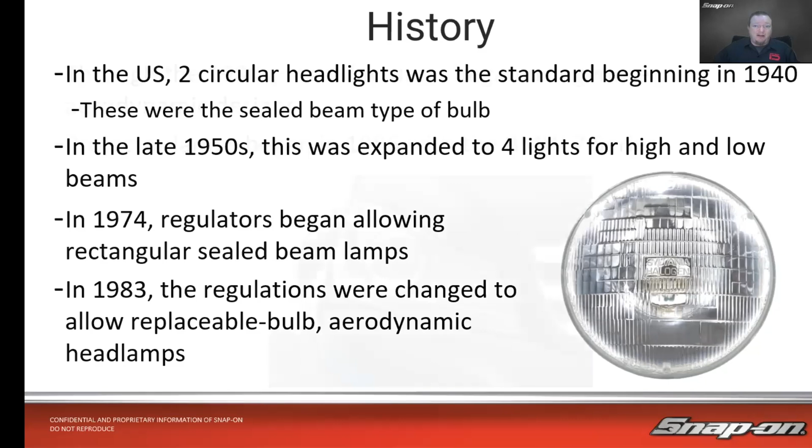And then the manufacturers kind of took that and ran with it. Throughout the 80s, manufacturers started using more aerodynamic designs, and projector lamps began in 1986 on the BMW 7 Series. They started using those projector beam type headlamps, which give you a sharper cutoff and so on.

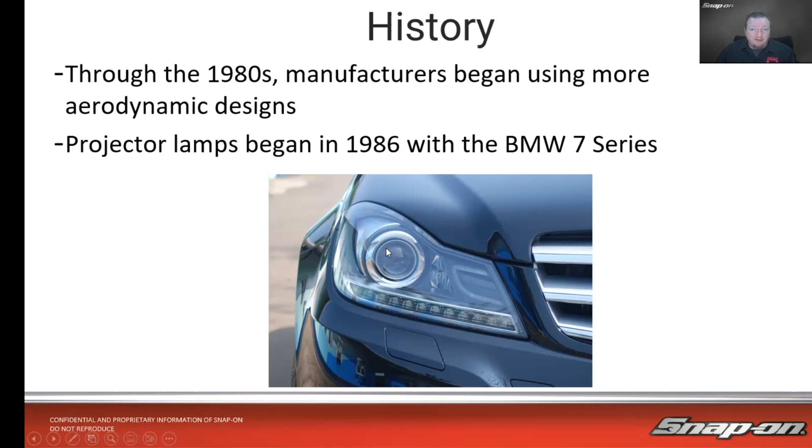That brings us to the 90s. During the 90s, manufacturers developed HID lamps. HID is high intensity discharge bulb, uses a high voltage, uses metallic salts in order to create an arc, and that's what causes the light.

The first mass market HID lamps were in the 1992 BMW 7 Series. So there's that 7 Series again. Seems like that's their experiment - let's put in the new stuff into that model, right? And then the first 4-bulb HID system, so low beams and high beams, was in the 1999 Mercedes CL class.

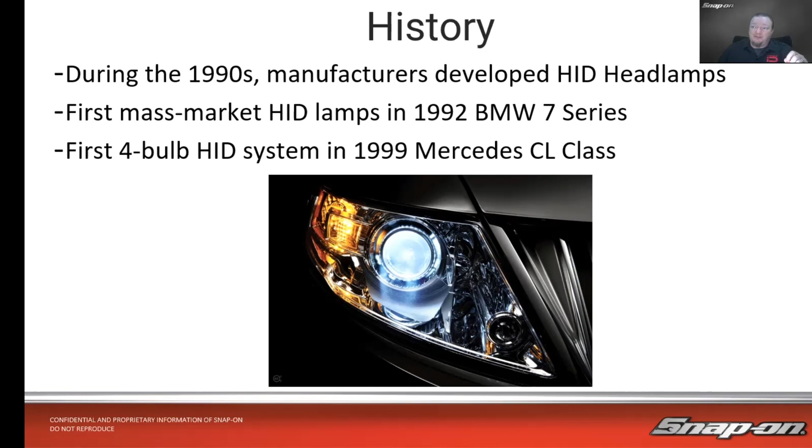That brings us right to the turn of the century into the 2000s. Now, starting in 2004, manufacturers started developing technology for LED headlamps. They didn't quite have it down until about 2006, 2 years later. First mass market LED lamps on a vehicle were in the Lexus LS600H.

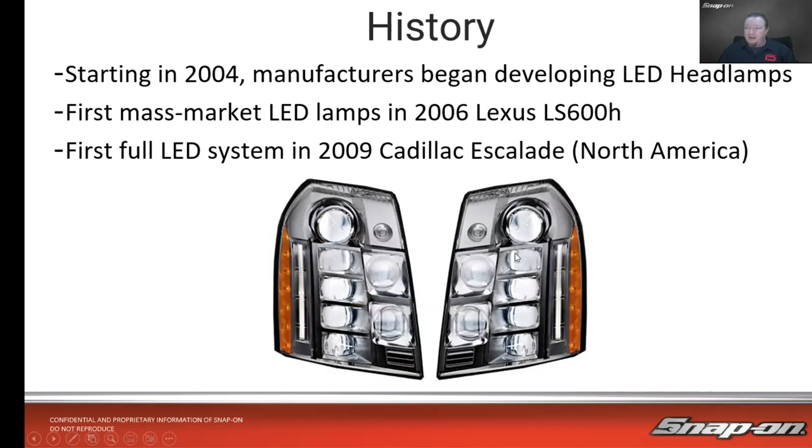The first full LED system, where all the bulbs were LEDs - they didn't use any halogen, any HIDs - was the 2009 Cadillac Escalade, and those are their headlights right there. Fully LEDs, no other bulb types in there, and that was the first one in North America.

Now let's talk about the projector lamp. They can be used with both halogen or HID lamps. What it does is we have our elliptical reflector back here where the bulb is in the back, and it'll bounce the light all over the reflector. Then it comes down into the chamber, and we have a lens right here.

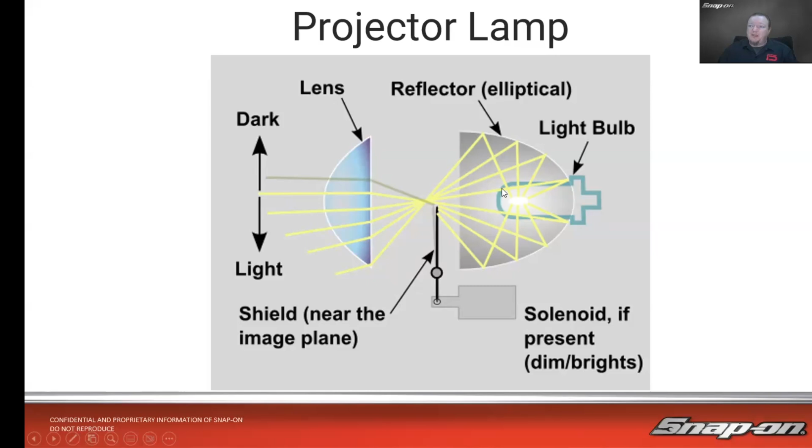Now, depending on where the shield is, it can give us both high beams and low beams. Not all vehicles or not all projector beams have this shield. It's only if I have the two-way, where I have a low beam and a high beam at the same time, and the solenoid will move it up and down and out of the way, so it can block off some of that light so it doesn't go through the lens, and that's where you get that sharp cutoff thing.

So as I said, projector lamps can be used with halogen or HID bulbs either way. They use that reflector and the lens that gives the beam that sharp cutoff. Combo low and high beams use that shield to change the light pattern.

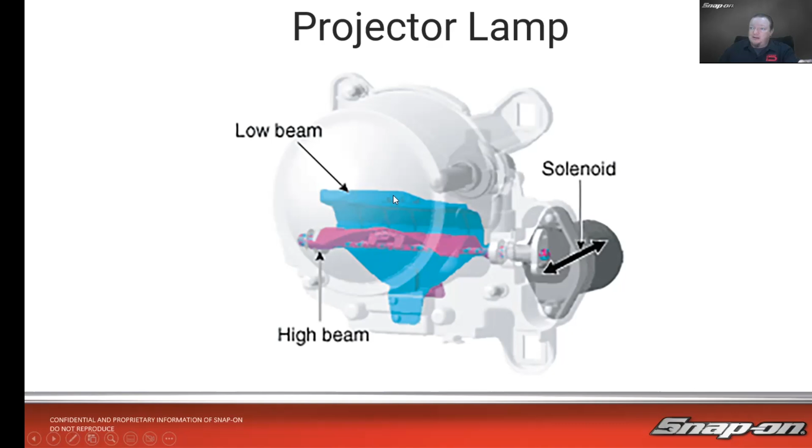So this shield right here is a little bit better view of it. We have a solenoid, moves back and forth, in and out, and it's got this little cam here that moves the shield either up or down. If it's down and out of the way, that's my high beams - it gives me my full output of the light. Or when it comes up, it gives me my low beam, and it gives me that cutoff at the top, so it gives me that sharp cutoff.

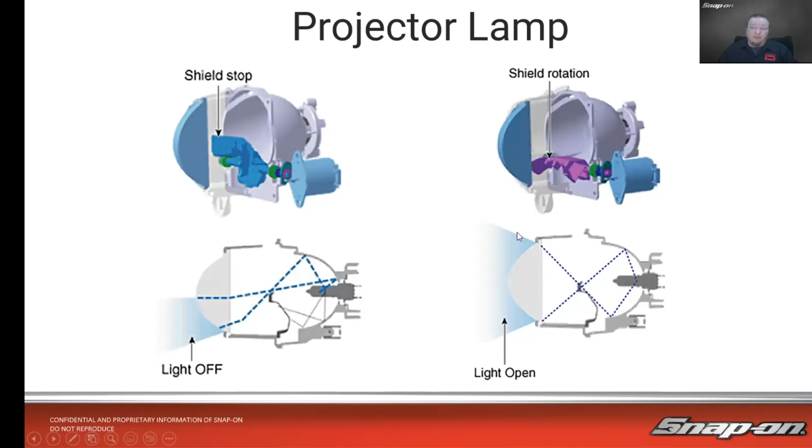Here's just an example of what that looks like. With the shield stop up, it's going to stop some of that light from getting through. And then with the shield rotated down, it lets all the light come through and allows it to go through the lens there. So we can see how the light kind of bounces a little more uniformly with the high beam, makes it much brighter. But it allows us to do high beam and low beam both at the same.

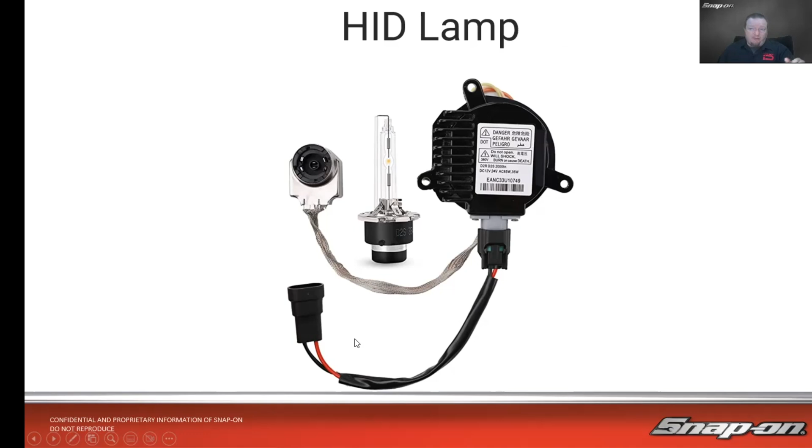When we're testing these, we want to test on the input side, the low voltage 12 volt side. Otherwise, the high output side can hurt. So what they do is they use a high voltage arc to ignite between those two tungsten filaments. You do need an AC ballast - it doesn't work on DC, it works on AC - and an igniter to supply the proper voltage.

You also may hear these called xenon lamps. Xenon gas is what they use inside that sealed bulb to get that arc started. Now the bulb has 3 different phases: we have the ignition phase, the initial phase, and then the continuous phase.

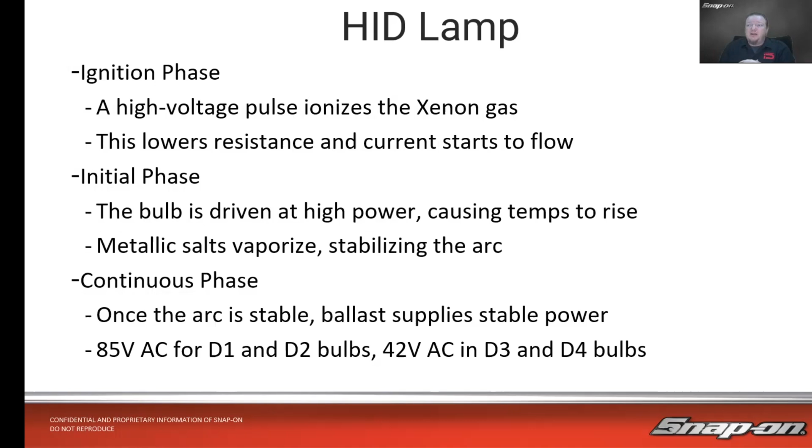During the ignition phase, a high voltage pulse ionizes that xenon gas - it could be 10, 20,000 volts. Works very similar in principle to a spark plug - we have to get the spark to jump. It's going to require more voltage to jump the gap than it is to keep it going. So once it ionizes the gas, it lowers the resistance, and current is then able to start flowing.

During the initial phase, it drives that bulb at a high power, high voltage, which causes the temps to rise rapidly in there.

As it rises, the metallic salts that are in there also vaporize, which stabilizes the arc. Then during the continuous phase, once it is stable, the ballast is going to supply a constant voltage, stable power to keep it from flickering.

They have different bulb designations. So D1 and D2 bulbs, you're going to see 85 volts AC. And on D3 and D4 bulbs, it's 42 volts AC there, so about half between the two. So it works on that principle of ionizing the gas and allowing it to flow. It forms a plasma, and the plasma is what glows and causes that very bright white light.

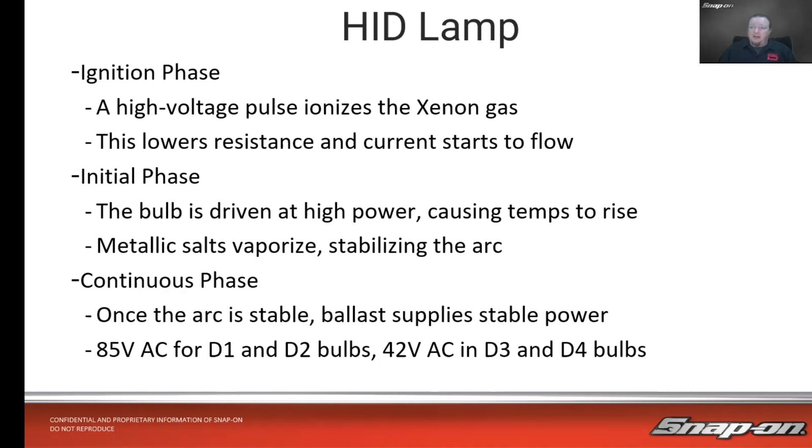Next one's LED lighting. So LEDs, as we saw there, stands for light emitting diode. Many benefits to these LEDs too. Longer lasting, so just lasts longer than a burning filament. Less power draw. Brightness is now better than HID. In the beginning, they weren't as bright, but now manufacturers have gone through changes and developments, and now the brightness is brighter than HID bulbs. And HID bulbs taking all that power to start them up, a lot more benefit with the LEDs.

That's why you'll see any hybrid cars, electric cars, almost exclusively LED bulbs. This also allows manufacturers flexibility in designs. I remember when they first came out with this Hyundai Tucson with the fancy LED lights there. Everybody's like, oh wow, you're blowing my mind here with these lights. They're not even the headlights, they're the daytime running lights, the headlights are down here. But they were just talking all about how it's so different. And it is. Yeah, it looks pretty cool.

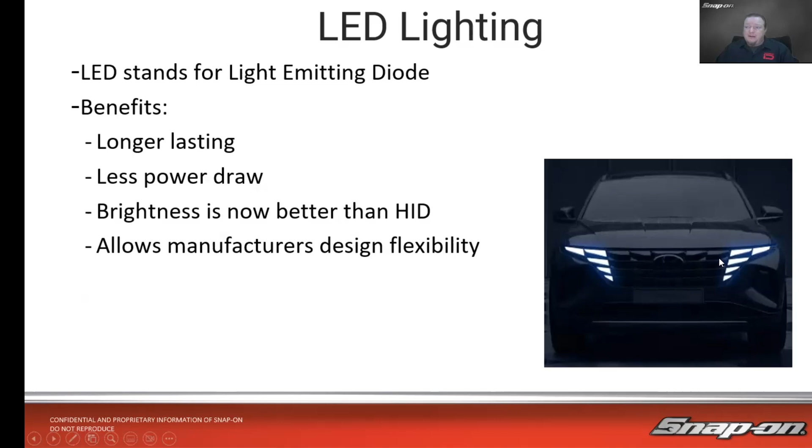And it's a 5-piece design. So we have the housing on the rear. We have the reflector and LED assembly, that's what does all the work. You can see the individual bulbs in there and how they would kind of reflect. An outer lens to protect it, lens bracket to hold it all together, and then a garnish on the outside to blend it in with the grill. But the LED lights, there's some cool things they can do with LED lights. We'll talk about in a little bit, like dimming just part of it in order to dim the high beams and so on.

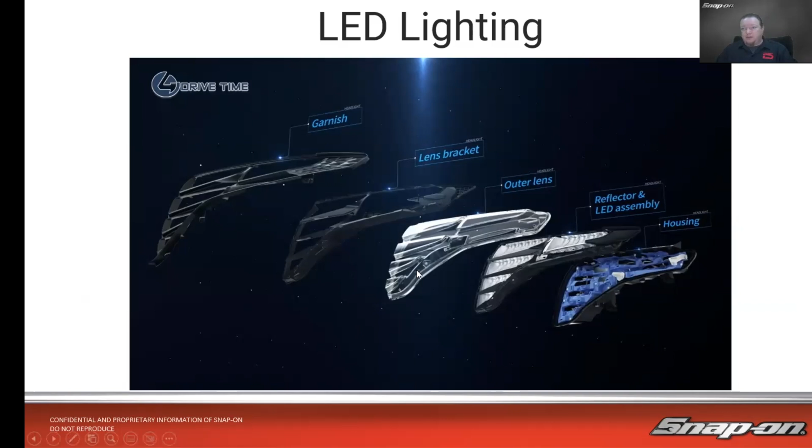Now let's get to intelligent lighting. So intelligent lighting is we're going to be dealing also with ADAS when it comes to this point, multiple sensors and servos, things of that nature.

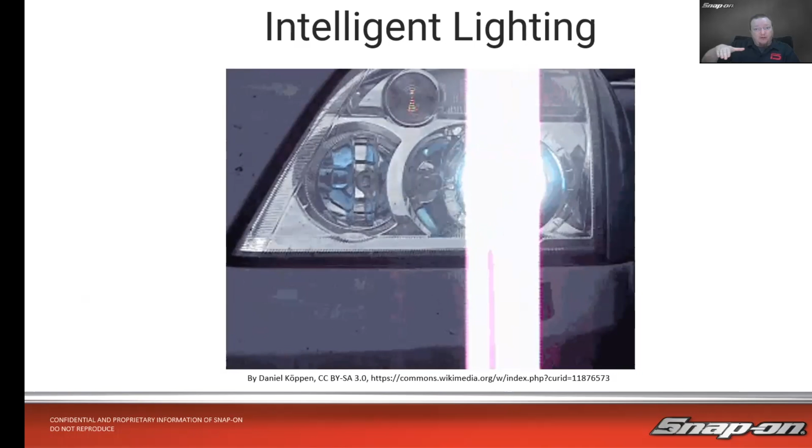It allows us to move the bulbs side to side if we need to, going around corners, allows us to level them out if the load in the car shifts and changes. So many modern vehicles use computers to control the vehicle lighting.

Of course, we have sensors and switches. Some examples include automatic headlights. I leave it on auto mode. When it's dark out, they turn on. When it's light out, they turn off. Automatic beam switching, so it can go turn on the high beams automatically for me, and then when a car approaches, it'll turn off the high beams or dim it, as we'll see in a little bit.

Headlamp leveling, as I said, different load values in the vehicle. It can be a little heavier on one side or the other, or heavier front to back, so it's going to level them automatically as well. And then we talk about directional headlamps. So turning right, my headlights go right. Turn left, my headlights go left. Now they've had those for a long time back in the day with the Tucker, one of the more famous ones that had that center bulb that did it. But now, instead of doing it with a linkage, they do it with motors and sensors.

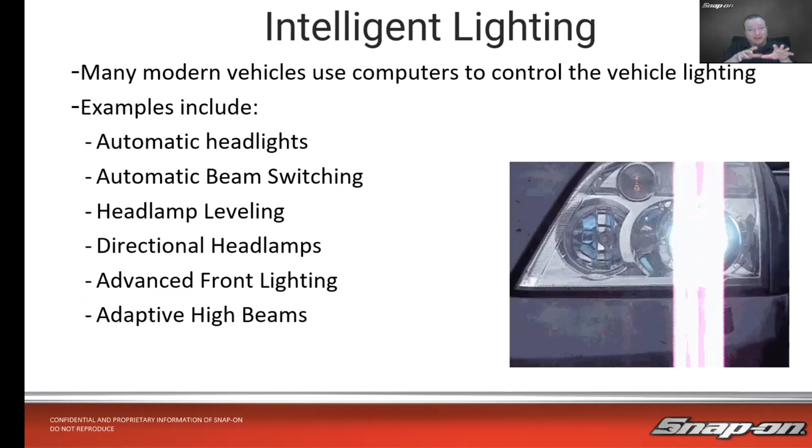Advanced front lighting, which would be being able to kind of form the beam, and then adaptive high beams again, able to adapt to their surroundings. So different manufacturers use different ways of going about this. There's a variety of sensors to do this.

So a lot of them use a front view camera: hey, I see a car with headlights coming the other way, let's dim our lights. Sun load sensor: if I have no sun load, then the sun's not out, and that means I need to turn on my lights. Rain and light sensor, same thing: if it rains out, wipers on, headlights on. Or light sensor, they could use it with that as well, so if they don't see sunlight, then they'll turn the lights on.

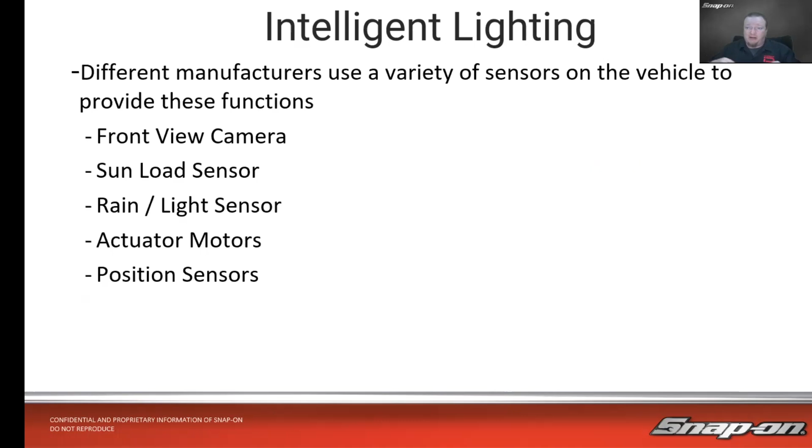Actuator motors to move the lights back and forth, up and down, however they need to be moved. And then, of course, the computer needs feedback for that, so there's position sensors involved with that as well, and resets and relearns and things that need to be done.

Here's an example on a 2019 Cadillac ATS. You'll see there's not a lot going into these lights. That's the left headlight, that's the right headlight. And we got power, we got ground, and we got network.

So to test these, we need to test power, we need to test ground, power supplies, but we also need to make sure that it's getting the network connection as well. So it needs to be getting data off the bus from a multitude of sensors, could be a ride height sensor, could be steering angle sensors, and so on. Gets all that information and tells it what to do.

So we have a horizontal motor, which does side to side, and then we have a leveling actuator, which goes up and down. And that's all kind of part and parcel of that headlamp. So it's a different way of thinking about diagnosing things when it comes to this.

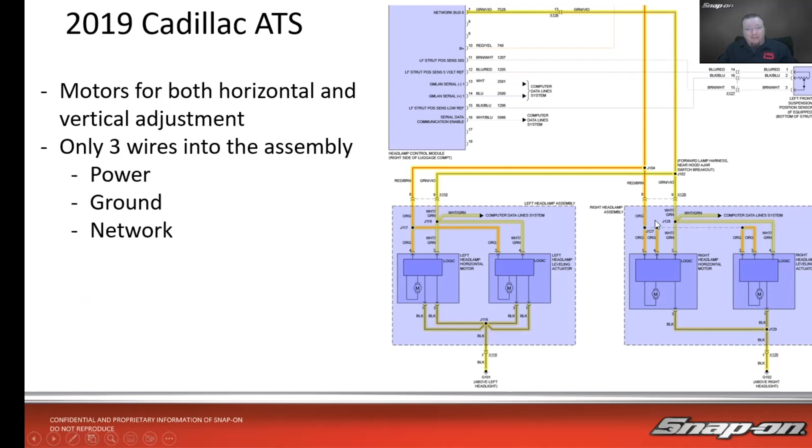This one's even more fancy. This is a 2019 Mercedes E-Class, and it's LED headlights. And what it does is it uses a matrix of those LED bulbs to auto dim the high beams. Now it can kind of turn them on and off and move them around. Adaptive high beams, they call it.

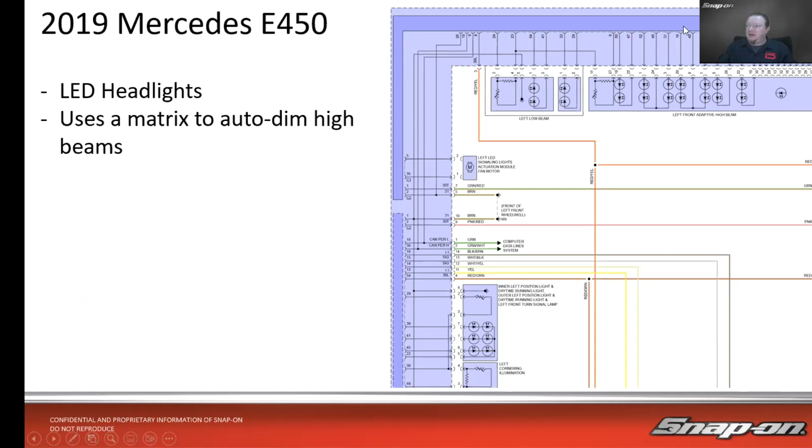And they have, you can see where all the LED connectors are. And this is the front LED matrix lamp, kind of goes around like that. So we can see we have these elements in here, these adaptive high beam elements, and then the low beams in there as well. And then we can see all the other little LED matrices in there.

Signal lights, fan motors, because the LEDs do generate a decent amount of heat, so they have fan motors in there. And then down here we have our inner left position light, running lights, outer left position lights, cornering illumination, and a couple more motors there.

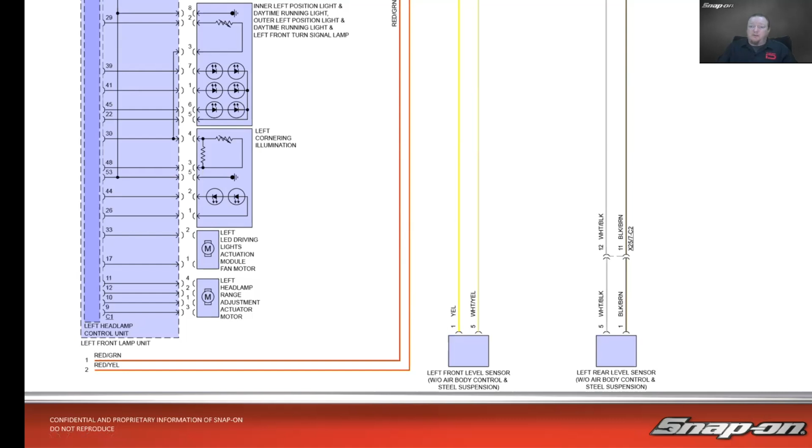Also, to feed into the system, front level sensors and rear level sensors, so it knows where the vehicle is in space, where it's moving. So some interesting tech there.

This one's really interesting, I think. Laser lights. So they got cars with laser beams. Uses a blue laser light to generate a beam, as you're found on BMWs. There's a couple other manufacturers that I think have been experimenting with them. BMW has quite a few vehicles with it.

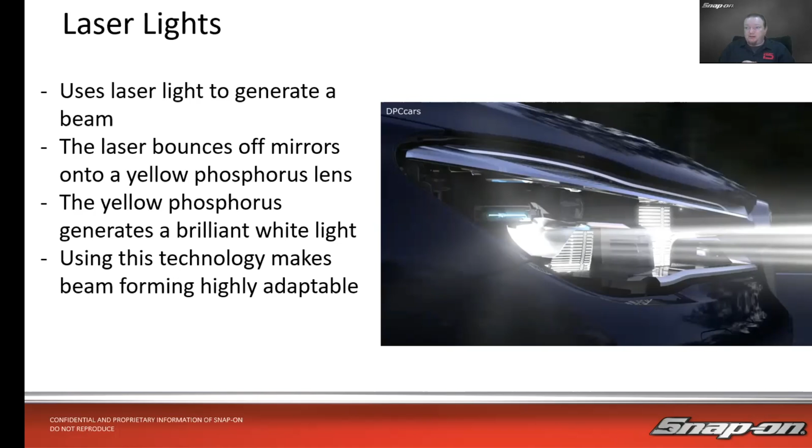Uses laser light to generate a beam that bounces off the mirrors onto a yellow phosphorus lens. So it's a lens coated with yellow phosphorus. That yellow phosphorus, when it gets hit by this blue laser beam, it's going to excite and it's going to generate a brilliant white light. Using this technology also makes beam forming highly adaptable.

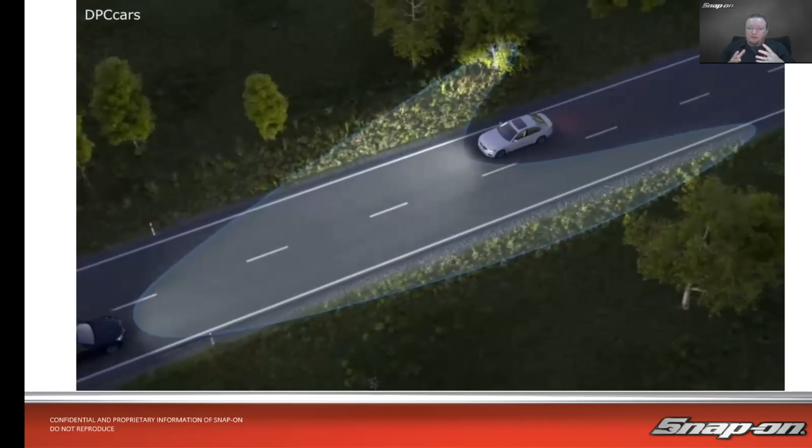So let's watch a little video here. Car's going down the road, oncoming car. It's able to shape that beam and move things around and adapt it to that other car, and then it just brings it back the way it is. That's pretty cool, let's play that one more time. So car comes in, it adapts the beam around it. When it finally comes close enough, it just sucks it in, and then it stretches it back out.

So I really don't have to do anything. I don't take my eyes off the road. I don't have to touch any buttons to do this. Another benefit of this, I was reading in an article today too, that they could use this as like a heads up display. So actually could project things on the road in front of the driver in their field of vision, like speed limits, things of that nature. Actually project that onto the road. And I think that's kind of cool. It's almost like that augmented reality, the AR stuff that's out there. It's kind of neat, makes it a little safer.

Also, the beams can go about half a mile down the road, which is way further than we can get with other existing technologies. So maybe eventually the price will come down, because I'm sure they're actually - we'll see how pricey they are here in a little bit. But interesting technology, and it's coming to a shop near you.

All right, let's switch over to my Zeus Plus. Yep.

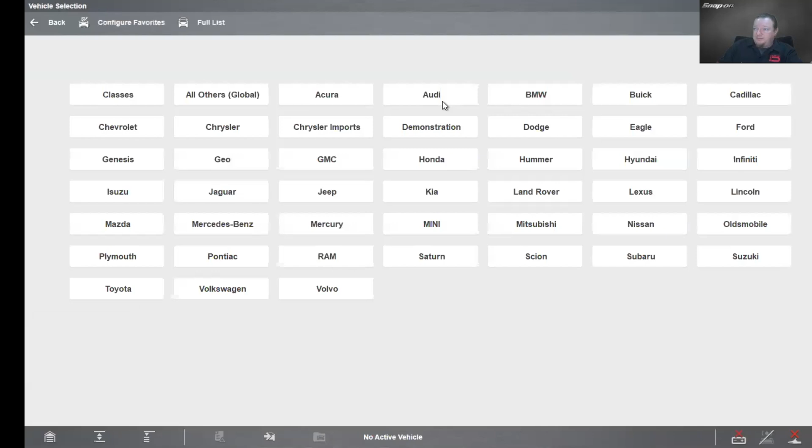All right, so before we even go in and ID a vehicle on this, let's talk about, maybe I want to learn a little bit more about this stuff that I'm talking about. So if you have a snap-on tool with guided component testing, that'd be anything with a scope, so Zeus Plus, Zeus, Verus, Verdict, Vantage, Triton, Modis - any of those tools with a scope are going to have guided component tests. And in the guided component test, before we ID a car, you'll see there are classes. And if we go into how-to, there's a couple classes right off the top here.

So we got HID lighting class.

High intensity discharge (HID) lights are now being used by vehicle manufacturers as an optional extra on many models, and may also be a standard fitment on top of the range models. This system replaces the standard filament bulb used for dip beam operation with a specially designed bulb. The bulb contains two electrodes approximately 4 millimeters apart and a quartz bulb containing mercury, metal salts, and xenon under pressure. The advantages of this type of system are as follows.

Due to the absence of a conventional filament, the lifetime of the bulb is greatly increased. You don't have to worry about that filament heating up and cooling off repeatedly. It can be as much as 4 times greater than a standard bulb.

The driver will have a wider field of vision and greater illumination during hours of darkness, and it allows 2.5 times the light flux at approximately half the temperature. Light flux is the flow of energy from the bulb in the form of light.

We also have a couple different ways that they can aim the bulbs. A system must be in place to automatically adjust the headlight level under transient conditions, such as cornering or when the vehicle has a load.

The lateral acceleration sensor can tell the vehicle's dynamic characteristics using cornering data from the electronic stability program. Signals are put on a CAN bus network where the HID control module can access the information and decide what to do, or use front and rear height sensors on the suspension so it knows what angle the headlights should be at.

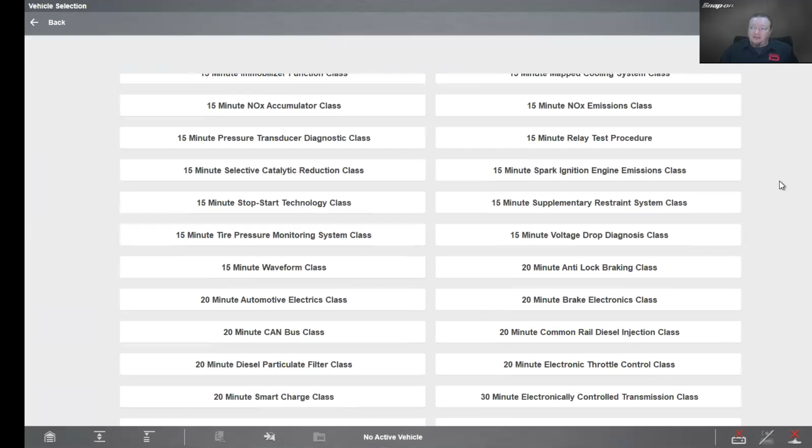Not that way. Activate. So this is a 2019 Genesis. Let's take a look at some repair information. Oh geez, I'm signing in too much—let me sign myself out.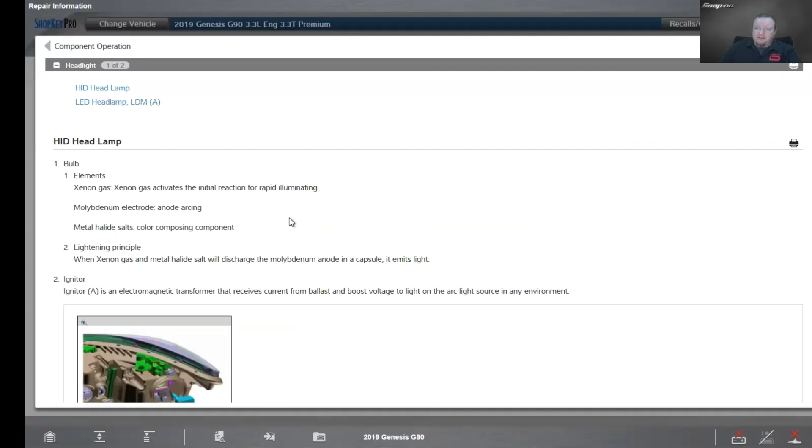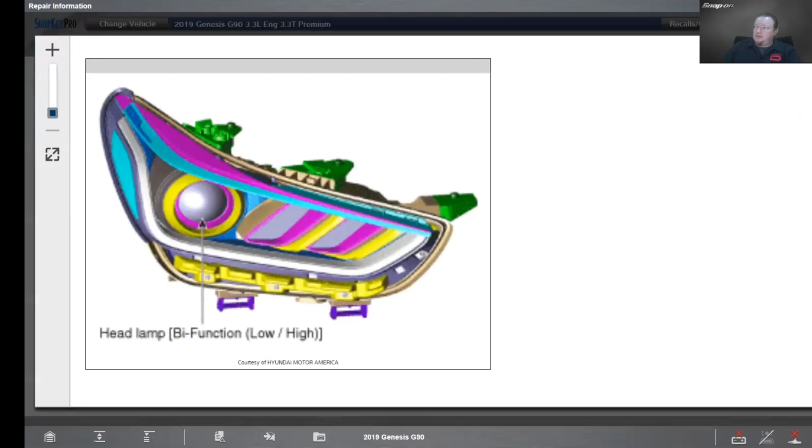All right, so let's look up headlight. Okay, so we've got some stuff here—a component operation section that will tell us how it works. We've got a little bit about the HID bulbs and bifunction bulbs, which have the projector beam in there as well, so it's got high and low beams—that's where I got the pictures of the little flapper there. We've also got the solenoid, and you can test it to make sure it works.

You can test the connections there to make sure that works. And the LED panel is going to be more like a light panel—it's going to have an LED module, cooling fan, and LED driver.

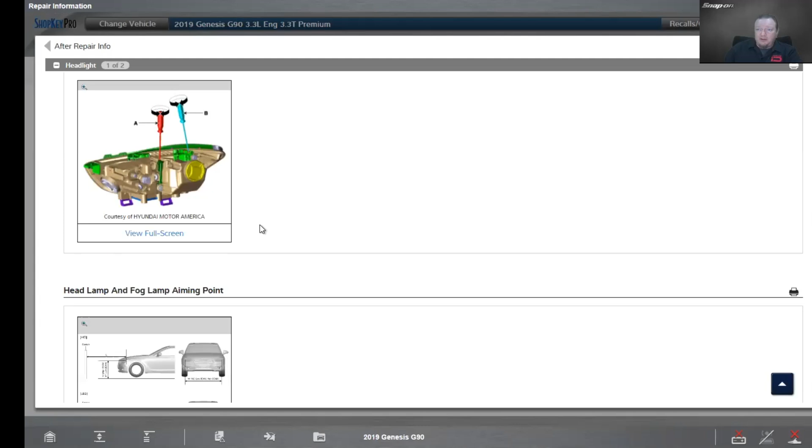Let's see—after repair, it's going to talk all about headlamp aiming, and yes, we are still using screwdrivers on some of these to get the actual lamps aimed. It gives you all of the measurements and things you need to do in order to aim them, just like any other headlamp.

There may be a reset or a relearn that needs to be done on some of these. Let's take a look at how long it takes—it takes about 2 hours to do both sides.

You've got to remove and install the bumper cover—that looks like that's the bulk of the time, because it's only a 2/10 of an hour difference between the two sides. And $1,700 for the headlamp assembly—that's one of the cheaper ones we're going to see, just so you know.

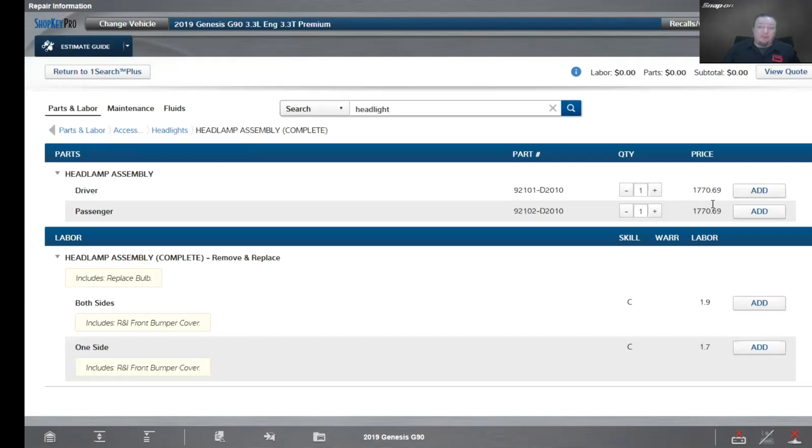Let's see, was there a guided component test on this? I think there are, yes. So in the guided component tests, there's also things for the lighting system. If we go into body electrical and exterior lighting right here, we can see HID headlamps.

If we go into information, it's going to tell us how they work—now, we already read through the operation there, but it can be up to 20,000 volts to start that arc. So just be aware, stay away from the business end of that. You want to check it on the input side.

The vehicle is equipped with a set of high-intensity discharge headlamps. These headlights implement a ballast igniter which increases the vehicle's battery voltage to a high voltage in the region of 20,000 volts. Caution should be taken while diagnosing these headlights, and testing should only take place on the battery voltage portion of the headlights, on the input side, as I said. This portion is the wiring harness traveling to the ballast igniter and back.

Never should one test the high voltage exiting the ballast igniter. Always follow the manufacturer's recommendations and warnings. Failure to follow safety warnings can lead to injury and/or fatality.

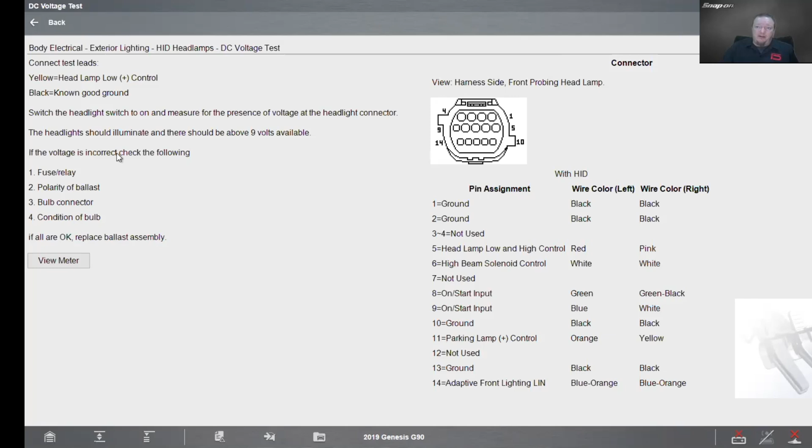Go to a DC voltage test, we can see where to hook it up. So headlamp low control right there, and it's the red wire on the left and a pink one on the right. We can see how each of the wires goes in there. Then we want to check it - that has to be above 9 volts for that to work.

All right, that's going to say failure because I'm not hooked up to a car, but you could go through and update the parameters in the module when you replace it. So that's pretty helpful.

Functional test for this, let's see what we got, if any. Not available because we're not hooked up to a car. Okay, so that's adaptive lighting and HID lighting on this Genesis.

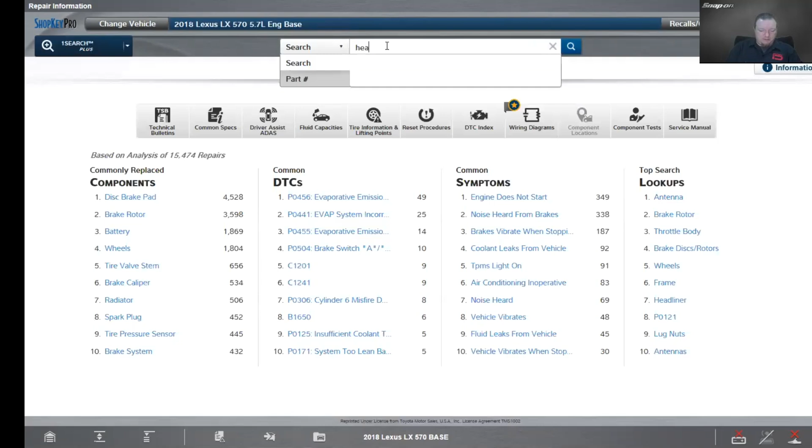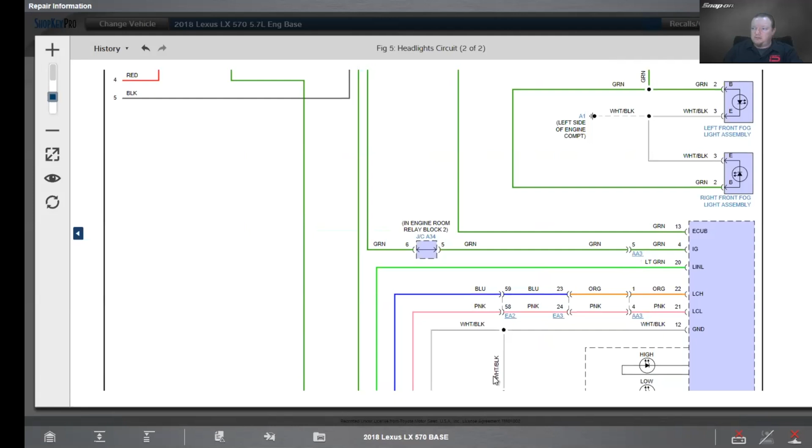So we got a cooling fan there, headlight leveling motor, high and low beams there. Also going to have our ground there, low side, high side LIN on this as well. So there's a network bus involved here as well. So a lot of network stuff going on, especially on these newer vehicles. We got CAN high and low right there as well.

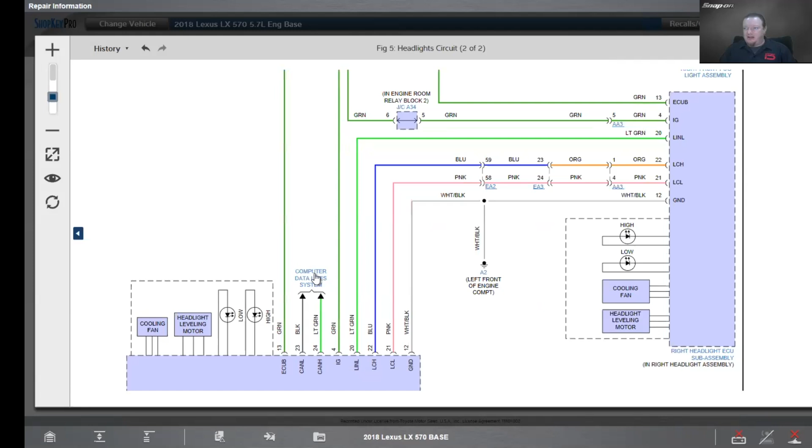So it looks like this side, which is the left side, it's got the computer data lines, and then it sends information over a LIN over there.

And these ones are a little more fancy. So let's see, after repair information, it's going to tell you how to initialize it using the scan tool if you need to. Then parts and labor, let's see - 2.7 hours, got to remove the bumper again, $2,900. So we went from 1,700 to 2,900. These are a little bit more fancy.

Going to guide a component test on this one again - body electrical, exterior lighting, headlight assembly. And we can go in there.

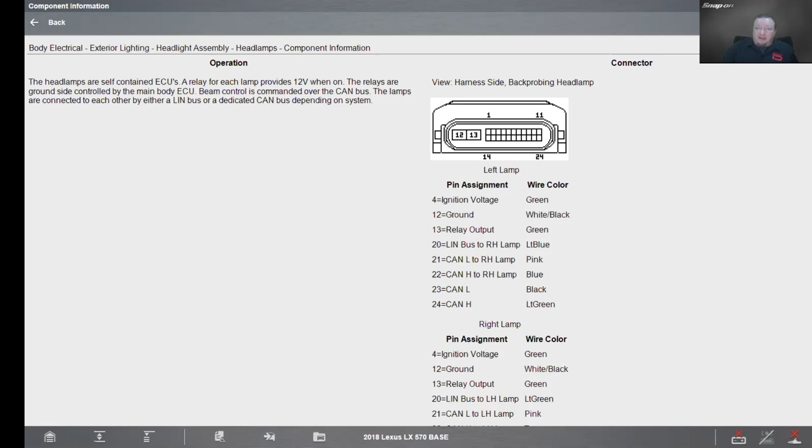It says, let's see - headlamps are self-contained ECUs. The relay for each lamp provides 12 volts when on. The relays are ground side controlled by the main body ECU. Beam control is commanded over the CAN bus. The lamps are connected to each other by either a LIN bus or a dedicated CAN bus, depending on the system. We have our picture of our connectors there, and then it's of course connected to the lamp.

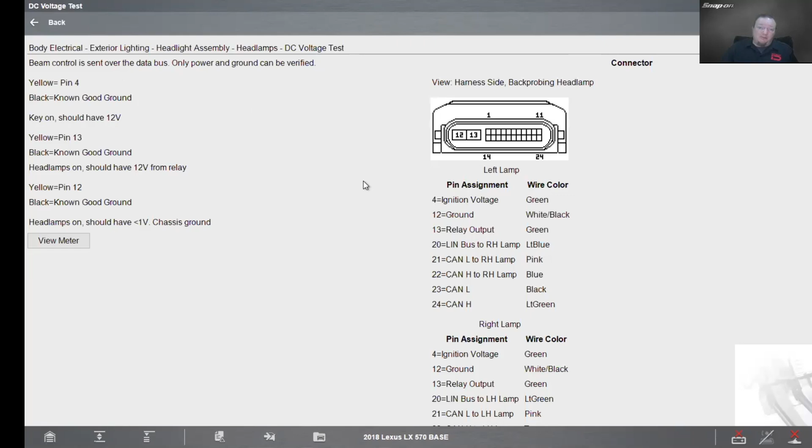Then we can do a DC voltage test, check for 12 volts from the relay, chassis ground, check for 12 volts there. Also check the data bus - you can check to make sure the signal's getting there as well with that. Scanner, see what we can find in there.

Adaptive front lighting and automatic high beams. So we go to automatic high beams - some actuator test there, and you can actuate it on and off, the automatic on and off. Not a lot exciting there. Come back to adaptive front lighting.

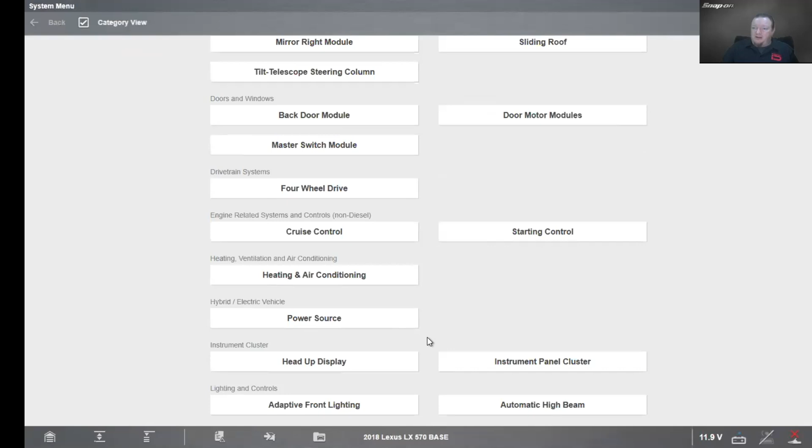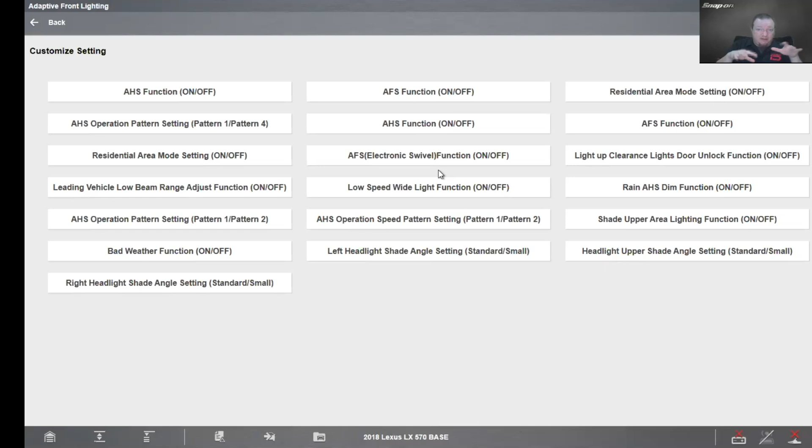System tests - all sorts of on-off functions, different pattern settings. You can go through different light patterns, make sure they're working properly. Bad weather function, headlight shade angle settings, standard or small, different patterns again. Wide light functions on and off. So there's a lot of different things these lights can do, and you can change the patterns and make sure they're all working the way they should. It's kind of pretty comprehensive there.

Let's look at actuator tests - drive the leveling motor, drive the swivel motor left and right on either side of the vehicle as well.

Right, let's look at this Mercedes. It's got those LED lights we saw before.

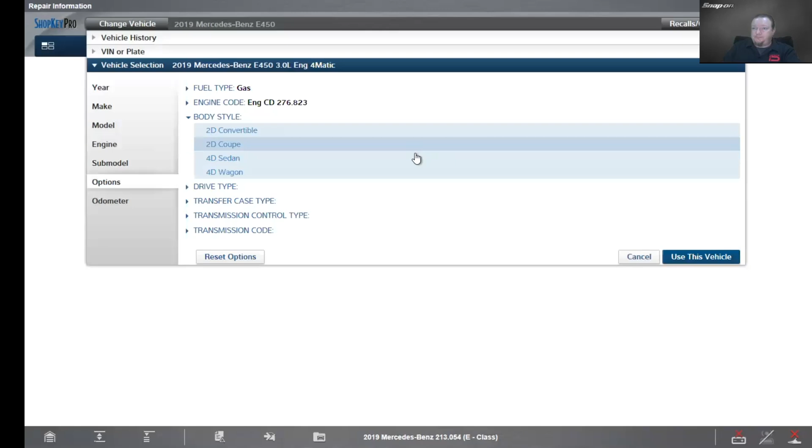There's TSBs on these too. Multi-beam headlamp fault in there. So this actually needs a software update, so that's a flash on that. If it causes a certain problem, certain code in there, it's going to need a flash.

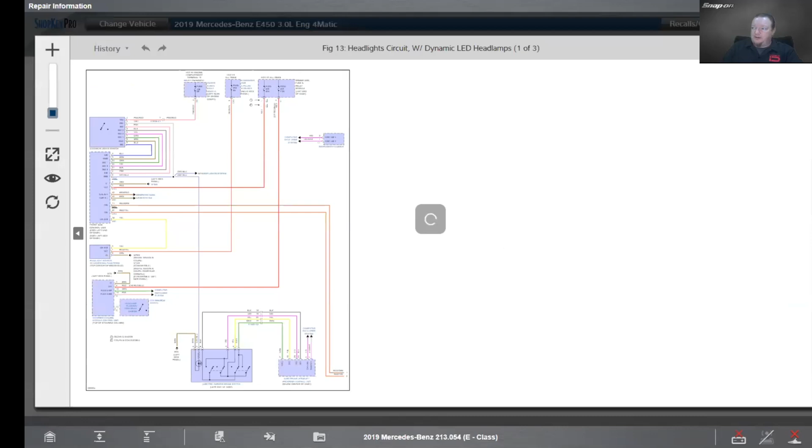Wiring diagrams we talked about earlier. Dynamic LED headlamp, so it can actually dim the bulbs dynamically. There's one of them, so it can dim it dynamically. We've got our computer data lines right there, so it goes out to the CAN bus, position sensors, fan motors, and so on. Range adjustment actuator motor as well, so we can send the range a little bit further down the road.

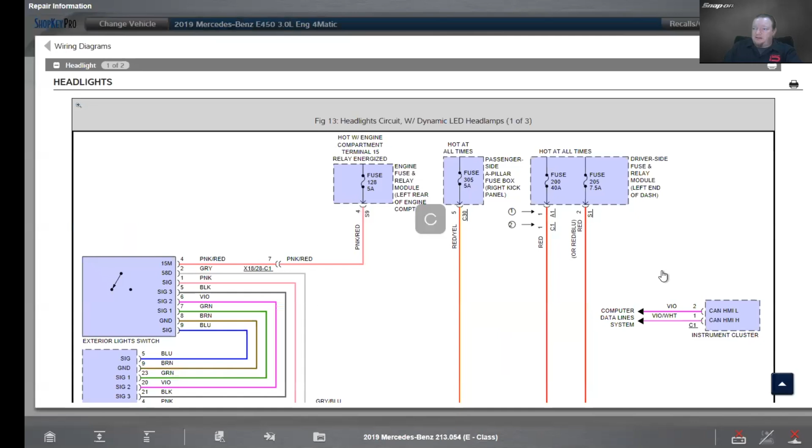And then let's see cost on these. Oh, this one's VIN specific, so you actually have to call the dealer, but it's 2 hours to do both sides.

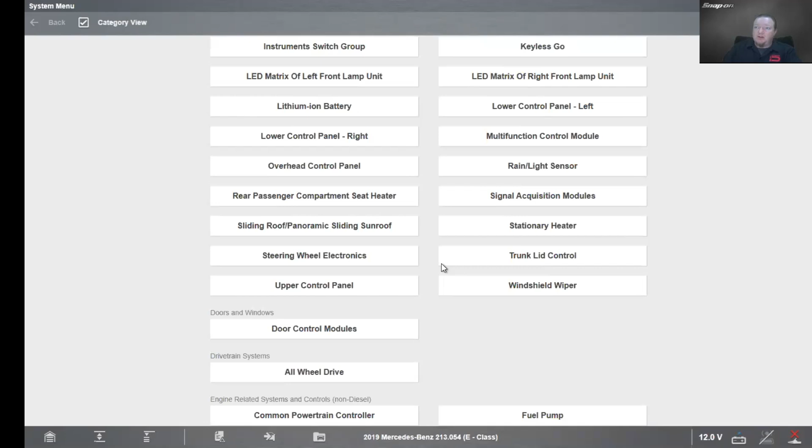Let's see what we have in the scanner. It's LED matrix there as well as in the lighting. Let's see what this one's got. It's self-test the LED matrix system. The actuator test, we can check the light distribution, LED exterior lights, resetting operating hours. So if you replace it, you want to reset the operating hours back down to 0. I'm sure there's a PID for that.

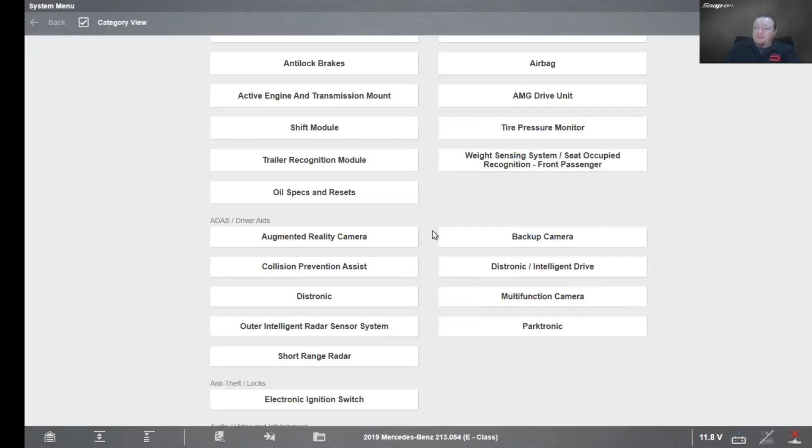Let's go all the way down the lights. I think we're going to have similar stuff down here too. Left headlamp, LED matrix module. So that's the same type of thing - reset the numbers. Let's go to a different module.

We can do the self-test again. Actuator tests, light distribution, and fan motor in that case. A lot of things can be done there.

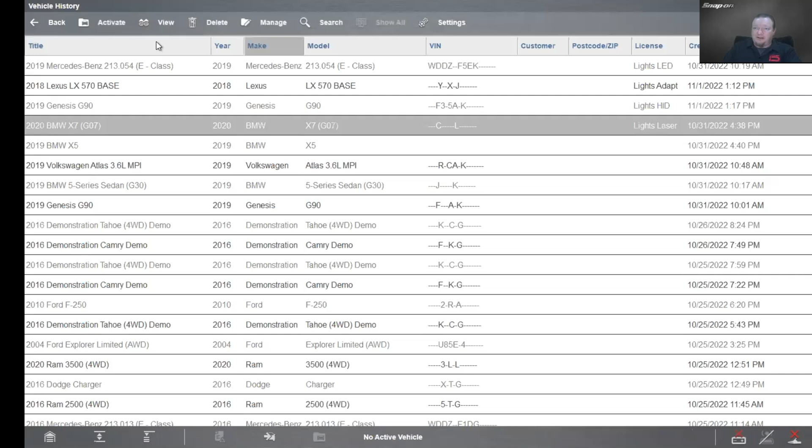And last one, let's look at those laser lights. Now, there's not a ton of information on these. I'm sure it's available if we call.

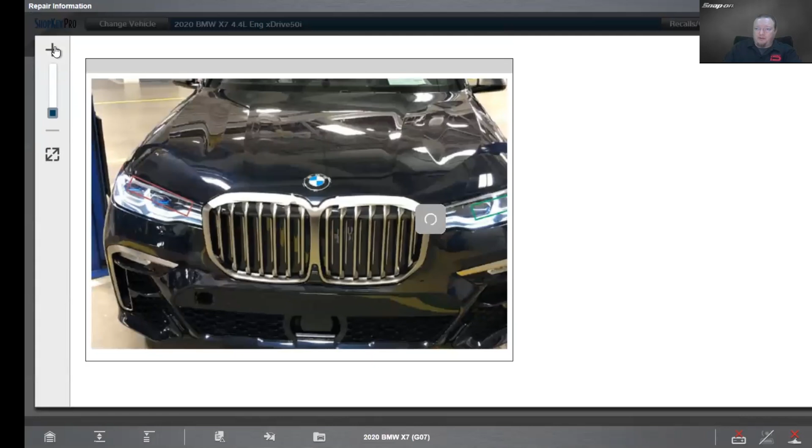TSBs on this one too. High beam headlight failure, fault message, dimmer discolor. There's actually a recall on the light lens as well, so they actually give you pictures. Here's what it would look like. So that's not good, and that's good. It should be white in color instead of the bluish color there for the laser lights. Another picture there.

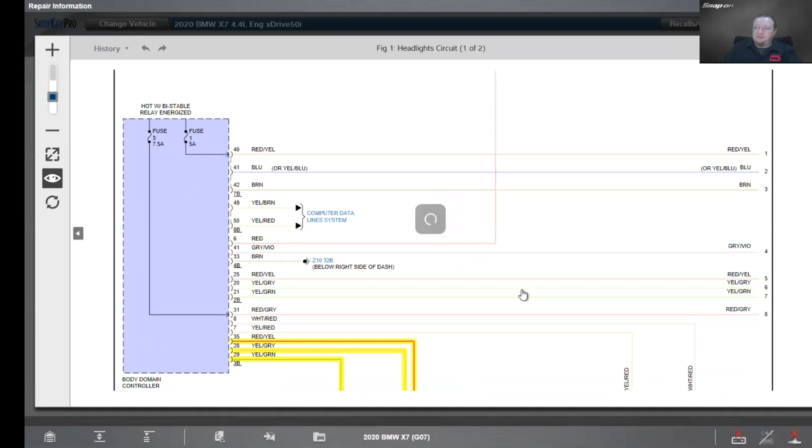Let's see, wiring diagrams - we can go in and actually look at what's involved in the light itself. So we have high beam, low beam, parking lights, laser motorway beam pattern, headlight beam throw adjustment, parking lights, adaptive swivel modules, fan - so all of that goes in as well. Not a lot of connectors there either.

And then let's look at parts and labor. So almost 4 hours to do both. And if you're replacing that laser headlight, you better be really good and sure that it needs that laser headlight, because it's $6,000 for a headlight. That's crazy. But I guess that's to be expected with fancy laser beams on the car, right? $6,000 retail from the manufacturer.

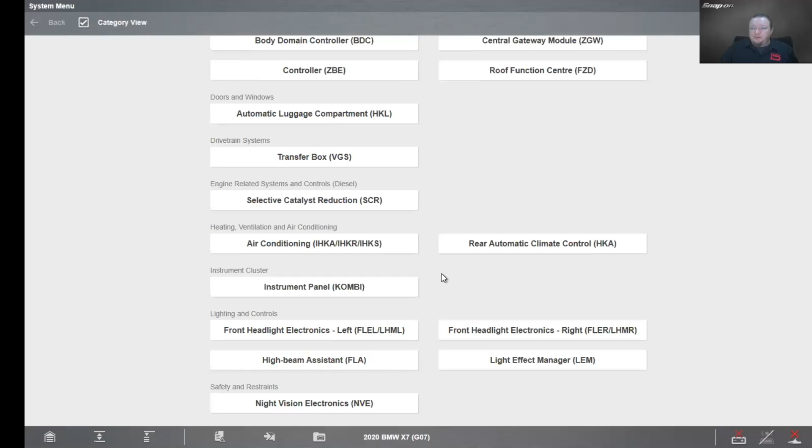Once again, not a ton going on in here either, because it is a fairly new system. We can go into the headlight module itself. A couple actuator tests in there. You can do the fans, you can reset, do the low beams, functional test, go through the LED light elements - you can turn them on and off, etc. So a lot of functionality in the scan tool you'll need.

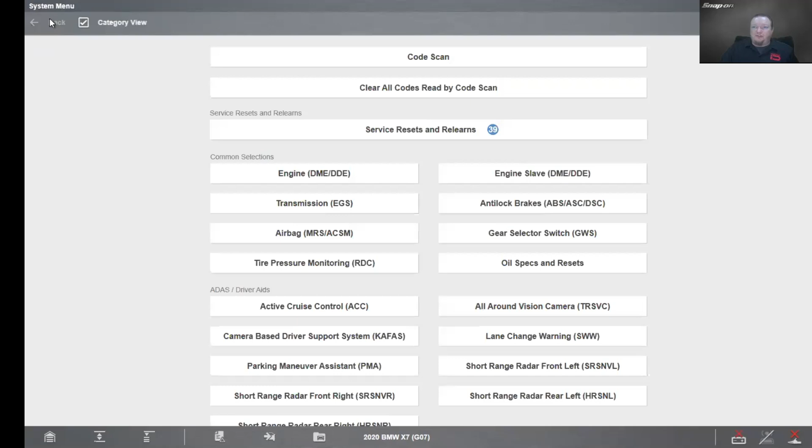Sometimes we can test them with a guided component test as well. Always be good to refer to your wiring diagrams, make sure you know where the relays are, how's everything look, before we go in and condemn a $6,000 laser. Okay, that one might be going back to the dealer. I don't know.